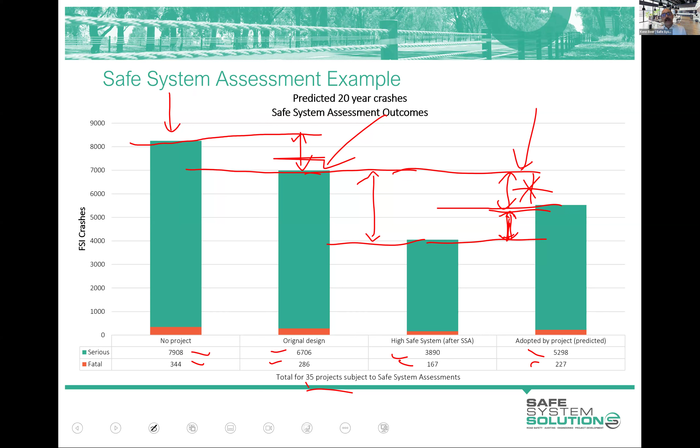It's probably another little addition that could be added to this evaluation, to say, what is the actual cost of those improvements? But nonetheless, they are able to be done, and they're accepted, and they're being built, and lives are being saved because of that assessment process. So that's pretty exciting. So that's one real takeaway out of this. Another one, I think it's important here. I'm going to change color on this one. Let's go to purple. What on earth is going on there?

Like we've said, 35 projects have had safe system assessments undertaken on them and provided recommendations on the best things that could happen, and we still see all of this residual death and serious injury, if they built all of the best things. Now, to a degree, this makes me go, this evaluation is probably pretty realistic, actually. They've done a decent job. Because this is stuff that either we do not know how to address, or is so far from politically, communally acceptable at this stage that we're not even recommending it in safe system assessments. And if you dig into what are all these deaths and serious injuries going on when we've done all this amazing road infrastructure?

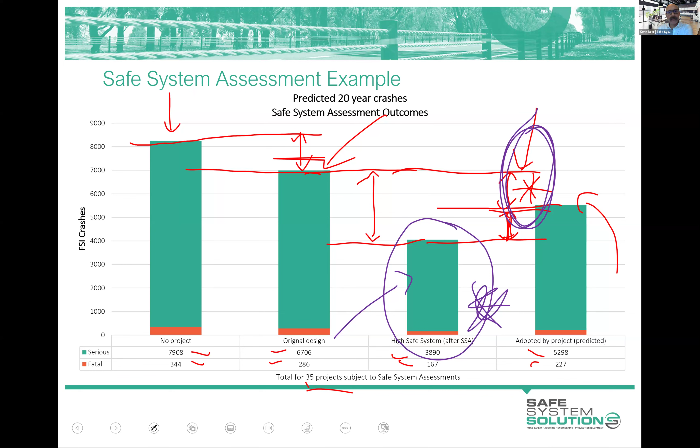Awesome. Okay. So that graph I was just showing, that evaluation, is a really wonderful demonstration of the benefits of safe system assessments and why we're pushing for those to happen. We're not saying road safety audits shouldn't happen. They absolutely have a place, but this safe system assessment process is available and it really injects safety into projects. It's a great way of determining how well a project aligns with safe system principles. You've seen the scoring. It's quite clear. You get some data, some graphs.

These things are quite powerful when putting them down in front of directors or executive directors or people making those final calls. Now we can put these down and say, hey, that's what it's been assessed as. Great for comparing design options as well. We've often struggled in the past to have anything other than an opinion-based comparative assessment technique for the safety benefits. Don't get me wrong, a safe system assessment has a bit of opinion to it, but it's more rigid in its structure on how to create that comparison.

It also integrates beautifully into a multi-criteria analysis, in the sense that you get numbers and you can feed those numbers into the multi-criteria analysis. Really nice at giving us those proposed design changes that will start to move us towards the elimination of death and serious injury, acknowledging the limitations we have at this stage, but we're going to continue to work on that. Great to assist planners, designers, and project managers to move the safe system approach from theory to practice.

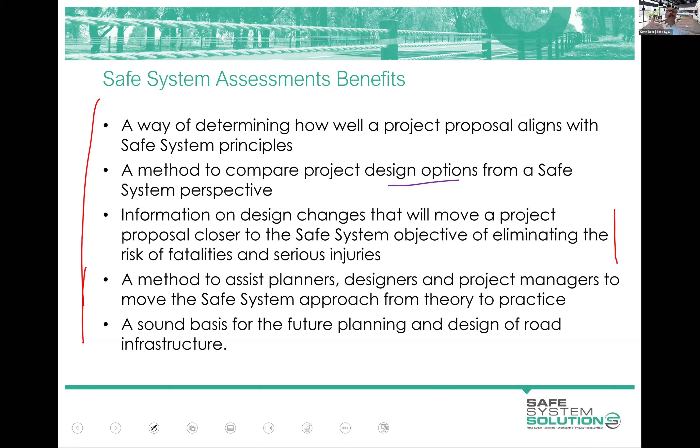We need local governments, state governments, territory governments, all getting safe system assessments done on their road proposals, their public transport proposals, their bike projects, their things. So a set of eyes like yours with some knowledge about safe system, and you'll continue to build that knowledge, but to be able to suggest things that we can get more savings of lives with their investment.

We know really that safe system assessment works beautifully in there because there's ability to still change the fundamentals of the project at these stages. Once you're down in something like detail, the detailed design's been done, they're very unlikely to change the fundamentals of the project. Budgets have been set usually, and things are moving along, and they're just detailing it up.

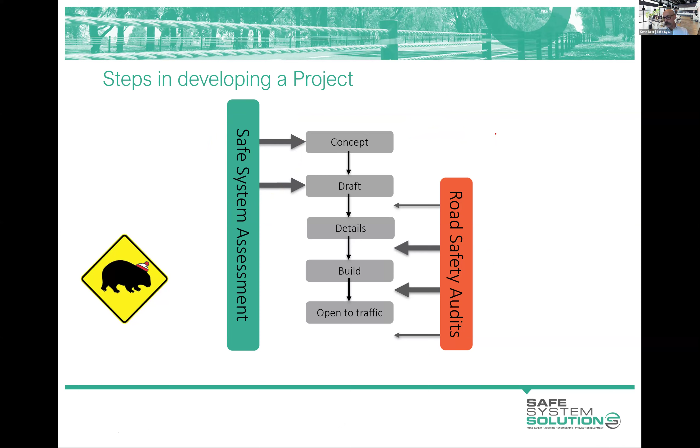Yeah. Okay, I'll show a little bit about that in like 5 slides' time, where I talk to you about some of the different registers that have emerged, like road safety audit registers and the like, and the things required to be part of that. So I will cover that in a bit more detail. And Brett's popped up one of the links that I will show as well, to the pre-qualification register for safe system assessors by the South Australian government. Victorian government has a similar one as well, but we'll get to that.

This doesn't come up as much anymore because safe system assessments are starting to be entrenched in practice in Australia. But for a long time, and it does still continue, people would say, why would I do a safe system assessment? I'm doing a road safety audit. That's going to cover it. And you say, well, yes and no. I mean, a road safety audit is a great tool. It injects safety into a project. All right. But safe system assessments have some other advantages.

And I've popped this sort of comparison little sheet. I have a more elaborate comparison sheet, and I've also included IRAP in the comparison sheet, the International Road Assessment Program. Maybe Loretta, we can dig that out. It's on our resource page on our website if you want, but we'll pop that into the learning management system.

But the likelihood of crashes is pretty well looked at in both audits and safe system assessments. The severity of crash is sometimes looked at in road safety audits. Sometimes it is ignored. And the classic is that large signalized intersection. And I see this in audits, I still see it, where they're looking at an 80 kilometre per hour road crossing another 80 kilometre per hour road, and there's a design for new traffic signals. And nowhere in that audit is it mentioning the result of red light running.

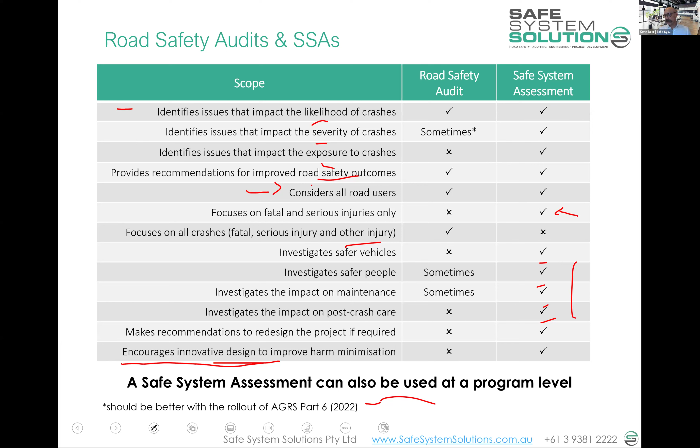Yeah, I had comments come in there. I mean, almost every jurisdiction in the world requires road safety audits to provide recommendations. New South Wales is the exception to that rule. Like, they don't want recommendations. So yes, recommendations are part of road safety audits.

Okay, so the way a safe system assessment rolls out generally is that somebody first of all decides, yeah, safe system assessment should be done. That's either a policy decision, they're following the policy, or somebody's got a reason why they say, yep, safe system assessment. Then there's a decision to be made: do we do a full safe system assessment or a rapid or light safe system assessment? I will explain the difference between these two later. They're not hugely different. There's just a few steps and a few efficiencies you get with a rapid as opposed to a full.

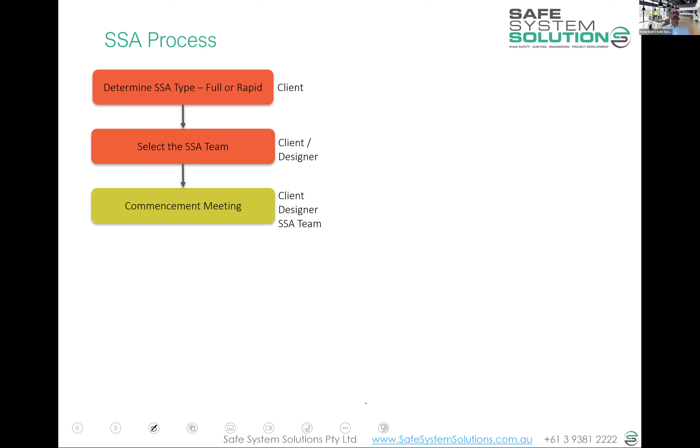Then they go, right, we're going to need to get a team together to do this. And they go and find a consultancy, or they get a team of people that they know have the skills to do a safe system assessment. And then they all get together, or they at least exchange information and make sure that everybody understands the context of the project, hand over all the designs and all the different planning reports and studies and collecting all of that information.

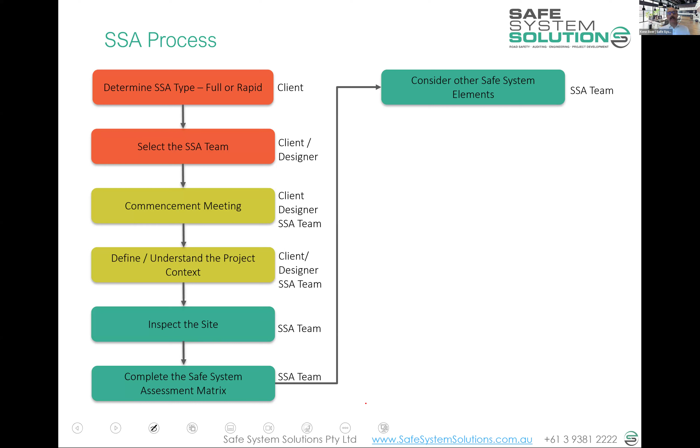Then the assessment team goes away with all of that, and they go out and they look at the site and they understand what the existing conditions are like, what the design is going to alter, how it's going to tie into different areas. They go and they fill out their safe system assessment matrix, which you're getting pretty good at now. They think through qualitative questions, and Max would have taken you through those, general broad questions. They come up with ideas to improve alignment with safe system principles.

They write it up into a report format. You've been given a template report. You're welcome to rebrand that in your own company branding, or your government branding, or whatever you want. But you're on that consistent reporting format and way that reports are produced. And they hand that over, and that's got recommendations. And the receiver of that report decides which of those things can be done and which won't be done, and then importantly actually makes those changes to the design and ensures that that's going to happen, so whatever's built is safer.

That's the general process, and people are generally pretty comfortable with this because it aligns kind of the same as the road safety audit process in general. And that was somewhat intentional in the sense of saying, well, we can add this process in, and it could replace the road safety audit process at different stages of the project, or be done alongside it.

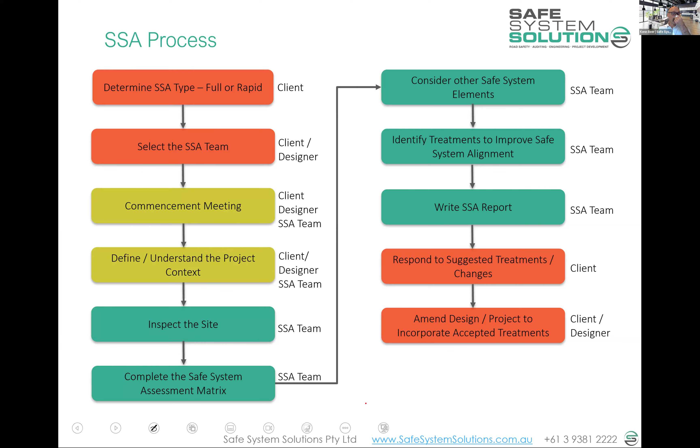Okay, the question came in around the register of safe system assessors. So the Victorian government has one on the VicRoads website, and you will be eligible to apply to be part of this after you successfully complete this course. The South Australian government has one as well, which Brett's put a link in there. And the way it works with the Victorian one is essentially you complete this course or an equivalent approved course.

Then you go out and you do a safe system assessment. Part of a team, you lead it, you do a full one, a real one, not the mock one we've given you as part of the assignment, because we need you to go through the full process with a client, essentially. And then you package that up and you send it into VicRoads. They review it. If they go, yep, this person knows what they're doing, they put you on the list. If not, they provide you some feedback and you can readjust it and have another go at it. So the Victorian one's just a list like this. It's a PDF, as the South Australian one is as well.

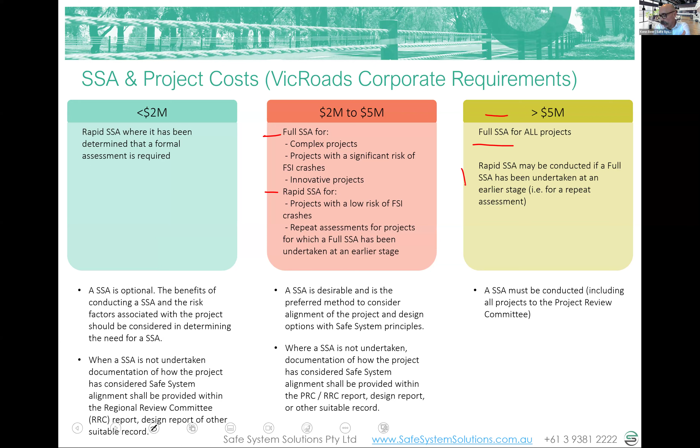So what is this rapid safe system assessment I talk about? Well, probably easiest I just show you the scope of both of these things. A full safe system assessment, you can see there, and a rapid. Now, if I run through the full, I'll cross them out if they're not necessarily required in the rapid. So commencement meeting, you're going to need to do some exchange of information. It probably doesn't need to be too formalized in a rapid. So I can sort of maybe half cross that out.

You're going to need to get the background information and context, right? Having a sit down workshop, roll out the plot and the plan and everything. Yeah, that can happen. It is even optional in your full, but it really doesn't tend to happen in the rapid one. Site inspection, again, this one is one of the ones that's said in a rapid, you may not need that.

You've got to look at the existing conditions of the site for both of them. Now, for the rapid, if you haven't gone to site, you might be doing that via photos or Street View or these sorts of things. Never as good as being out on site, but if we're just moving it through for a lower risk site or something like that, okay, it might be appropriate. You look at the existing conditions, you do your matrix. You then look at the design and you do the matrix.

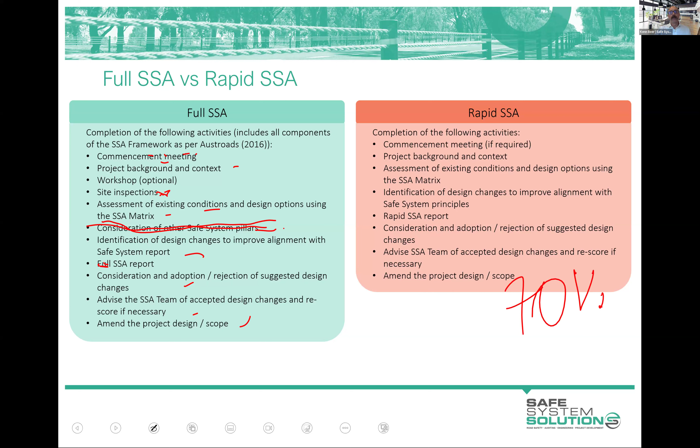Okay. I think I'll show these road environments after we have our stretch break. It's just a few road environments to, again, just talk safe system alignment. What's the best we know of at this stage? So you can be going out and making good recommendations as a safe system assessor. Any questions, Loretta, before I give everybody that stretch break?

Yes, please. So for a bypass where the existing route is still used once the bypass opens, say by local trips, is the existing base case the existing route? And for the design options, you'd still include the existing route as it will still be used. Yeah, it's a very good question. And so the answer is yes. If you've got a town, bypass is a great example. So if you've got currently a road runs through a town, that's your base case. Then you go to a bypass, right?

What you'll do is you'll look at the bypass route and you will create a safe system score matrix off that as compared to the existing route, but you need to account for what existing things will happen on that route. I can send an example of how that would work, but one of the real advantages of a safe system assessment under those scenarios is it really shows you this is a wonderful opportunity to do some significant works on that existing route.

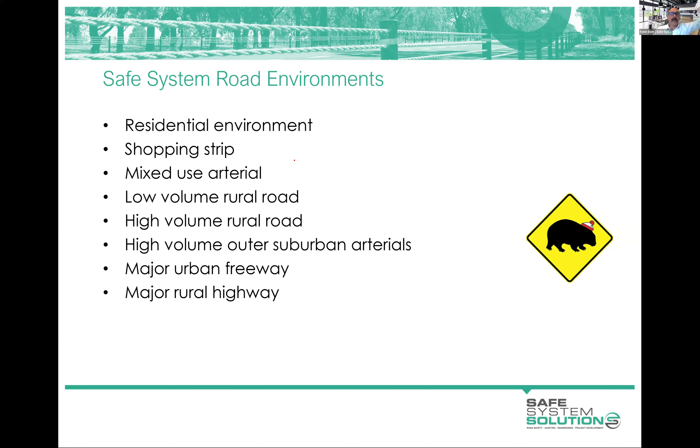We'll jump into it. So residential street environments, really under that movement and place context, which Max talked to you about, and thinking, what are our priorities for these sorts of roads? It's certainly not getting vehicle traffic through it quickly. So anything we can do to lower speeds down is going to be better aligned with Safe System principles. And in fact, blocking off a lot of the ability to use this as a through route is highly aligned with Safe System principles, reduces our exposure to crashes because there'll be less vehicles through there, and lowering speeds through speed limits, local area traffic management.

Now, some people talk about removing car parks to remove likelihood of crashes. I always caution you slightly on that. Yes, okay, we've opened up sight lines and things like that, but the cars parked narrow the road down and really keep people a bit slower. If you're going to do that, you kind of want to replace it with things that would keep that narrow nature or local area traffic management features to keep that speed down.

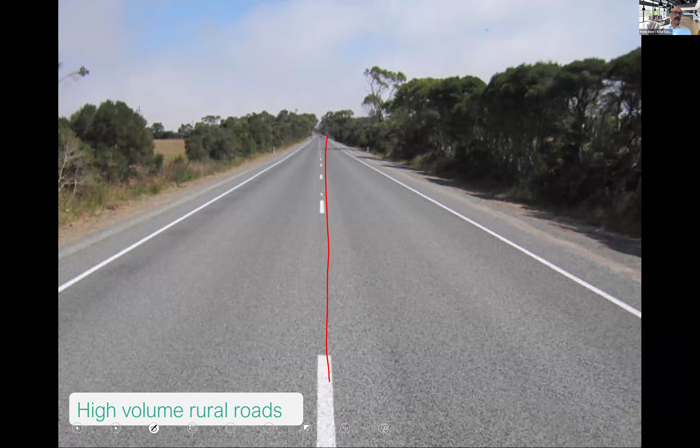On our higher volume roads, though, this is where the infrastructure spend goes. Doesn't look higher volume here. It is a much higher volume road, but really center barrier systems, outer barrier systems, providing that full containment. So high speeds, your 100 kilometer per hour and 110 can still happen, and vehicles can make mistakes, or drivers can make mistakes, and they are protected. Okay, it's expensive, but you are targeting this at your highest volume roads.

And then you sort of link that, if you've got that central barrier system, you can put a roundabout down there, because that's a really nice setup. If you've got access points and things, they can use the roundabout as their U-turn facility. They come down, they U-turn to go back the other way. You don't need to put lots of breaks in your barrier, and you can strategically lay out a route based on roundabout, central median. And that's a kind of fun exercise to do.

It's sort of forecast out a 30-year plan for a road, higher volume road, and say, okay, these are the big intersections we're going to roundabout out, and then we're going to put central barrier systems here and here, and then they'll use that. And then you can segment off, deciding how you roll that out in phases. It's sort of what we call a safe system scope ladder, where you'd say over time, what's the end state of this road that we want, and how do we step by step get there with this blueprint of the end road environment we want.

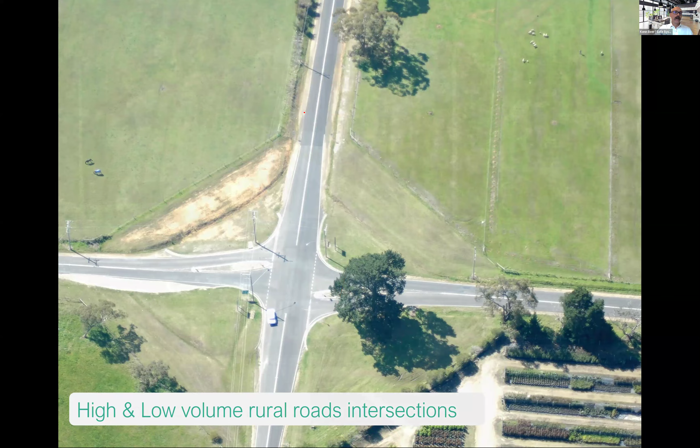Loretta. What about the use of musical roads to break the monotony of long drive and increase driver attention? Yeah, so the Japanese were the first to sort of do audio tactile edge line of different height and different spacing to create music, essentially, with that audio response into the vehicle. And it's kind of fun. I just love the fact that somebody's worked that out. And if you're driving the right speed and you go over it, it plays your little song. Fantastic. Love it.

In terms of fatigue management, we have trialed so many things to keep drivers awake. And the reality of fatigue is that you wake them up for a very, very short period of time, like 30 seconds with something like that. The only thing that cures fatigue is sleep. Maybe some illicit drugs, which we don't condone for other reasons, but you really struggle using physical infrastructure to wake drivers up.

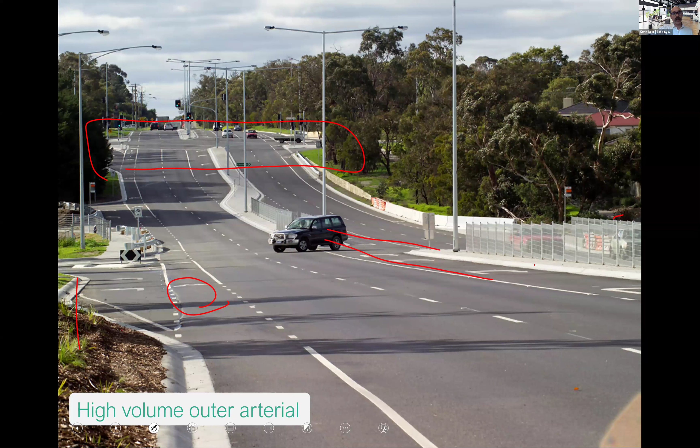But on these high volume suburban arterials or your major traffic routes, really those decisions have to be made. If this is about moving vehicles through there as fast as we reasonably can, you don't mix vulnerable road users with this 70 or 80 kilometre per hour traffic. That has its own separated, dedicated facility. We have to manage the energy at these sorts of major conflict points. We look to possibly close off areas like this if we can.

And then you're right, like bus stop, when they're dropped off or when they're getting to the bus, they're going to want to be going across here. So we've got to provide those separated facilities or slowed facilities. So lots of sort of stuff there to try and lessen likelihood of crash, but severity of crash,

and thinking genuinely about severity. So often in these higher volume outer suburban arterials, people just throw away the idea of severity and they just go, it's a new road. It's got great surface. It's got great lines. It's got great signs. We've got mast arms on the signals. And no, we need to say, crashes are still going to happen. How do we make them not severe?

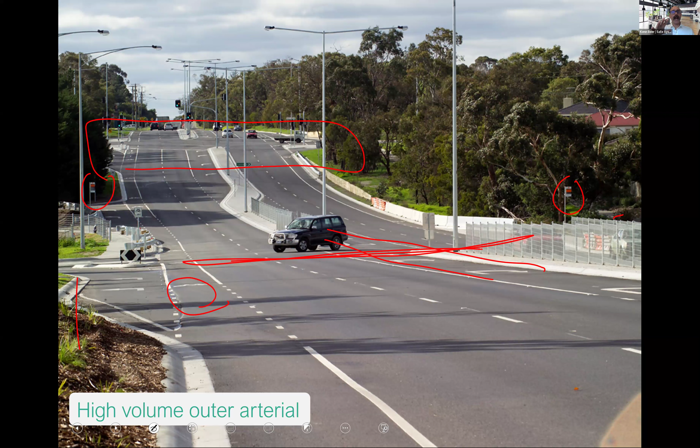Motorways, freeways, they're very safe system aligned. They really do have great safe system inherent design characteristics. Vehicles not able to crash head on. Generally continuous barrier systems, so when vehicles leave the road, they hit a barrier rather than a tree, a power pole, a culvert or the like. They don't have at-grade intersections. So we've got that delta V, the change in speed if crashes happen. So they really do perform well.

Where we understand the challenges with safe system here are with broken down vehicles and pedestrians getting out, or vehicles stopping late at night, taxis often, and pedestrians getting out and doing all sorts of stuff. They're usually intoxicated, and you see some pretty high rates of pedestrian trauma on motorways, and it's surprising considering that they are areas pedestrians are not allowed and fenced off from, but it is around that getting out of vehicles.

So that's one. And then as flow breakdown starts to occur. So when these are operating like they are in this picture, essentially free flow, extremely low crash rates. When they are absolutely congested, basically gridlock, the crash rate is high, the crash severity is nothing because there's not enough speed. So your fatal serious injury crash rates are non-existent. It is when we see flow breakdown starting to occur, so it's congesting and we get these rear end crashes and people at speed.

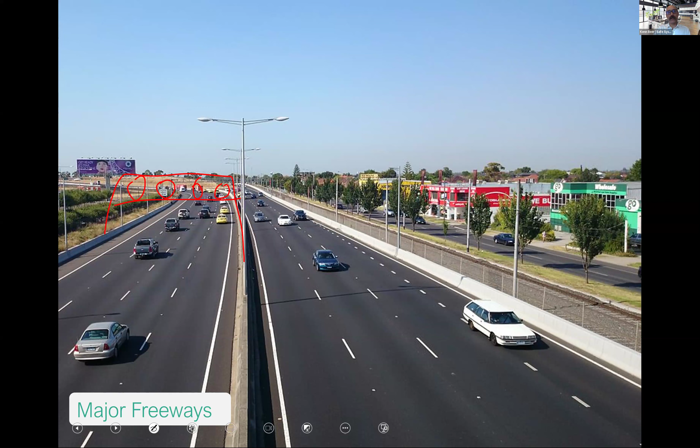So essentially managed motorways is our safe system next step on these, which is essentially to have gantries that can manage speed proactively just before flow breakdown, can block off lanes, can detect incidents early and lower speeds to manage that, have on-ramp ramp metering signals and the like to try to manage all of these incidents.

And I think finally our major rural highways, again, a bit like some of those other ones. I mean, these large medians are no longer needed unless you plan to add lanes into that in the future. You can just simply narrow that down, provide one central barrier system with a nice sort of 3 or 4 meter offset between each lane. That's going to be a really wonderfully safe system aligned outcome. If not, you're doing a run of barrier down each side, ideally, run of barrier on the outside.

This is the Hume Freeway. I did a business case for this one, $101 million basically of barrier system, just roll it out. And that was successfully done. It's pretty much full containment from the M80 out to the New South Wales border now. There are patches which are a little bit harder, but that's what you've got to do to create these high speed road environments,

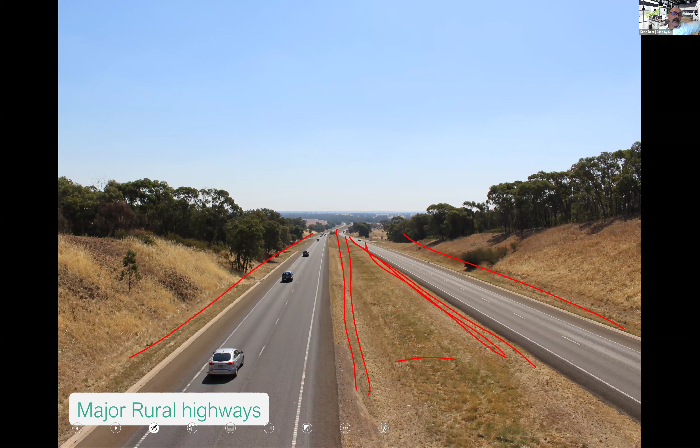and intersections, either grade separated or I would love to say roundabouts as well to slow those speeds down. The challenge on that is often these are your major national freight corridors, and they get a bit narky about slowing them down too much with roundabouts. So grade separation, obviously, but there is the ability to operate some at-grade intersections at high speed. If you've got a road like this and it's got an intersection like that, you've got a median in the middle.

The way you can sort of operate something like this at higher speed is close that off. You definitely can't have them crossing right angle on 110 kilometer per hour roads, and you provide an acceleration lane. So you get them up so the delta V, the change in speed, is equivalent. So full length acceleration lanes. Then you need enough space for them to get over, so you need some distance there. And then you provide that full acceleration lane back. And then again, the delta V is appropriate. And then they can either make their left turn or go straight.

And that's how you theoretically can operate these without having to do grade separation or a roundabout as a very well-aligned safe system treatment. The sort of interim one that is used a lot are those side road activated speeds. So when a vehicle's coming up here, either radar or loops trigger a speed limit reduction on this road, so for vehicles coming through here and vehicles coming through here. And they're proving pretty successful as well.

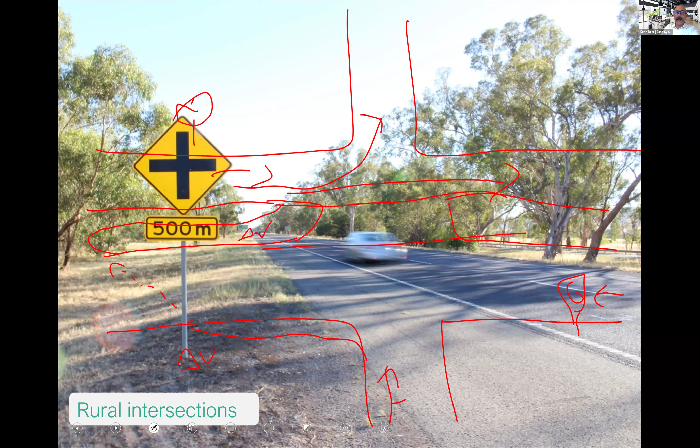And I think we're seeing some good low-cost trials out there. Brett, who's on this one, has been working on getting some nice low-cost ones of those. We've done lots in Victoria, probably a bit more expensive. And we want to start really deploying that sort of stuff.

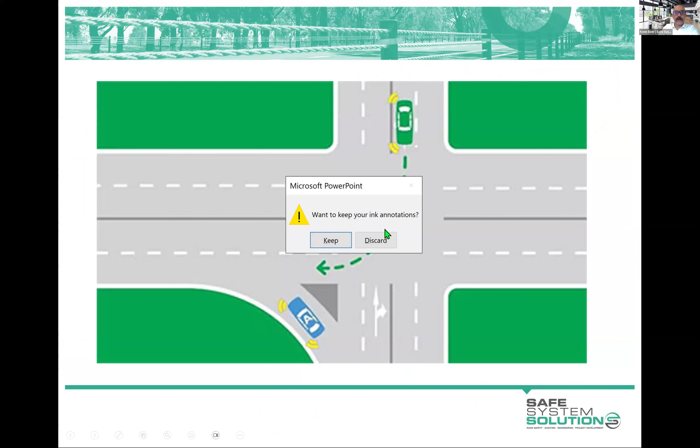Okay, I think that's probably about where I wanted to get to, timing this beautifully. Very briefly, I'm not going to do this extra content at this stage. You're probably still seeing my screen. If I can find my, here we go. I just briefly wanted to show you what an output of a reasonable safe system assessment on a pretty big size job kind of looks like.

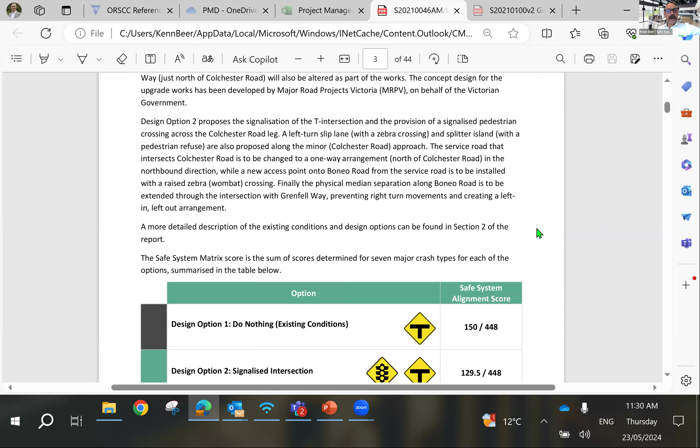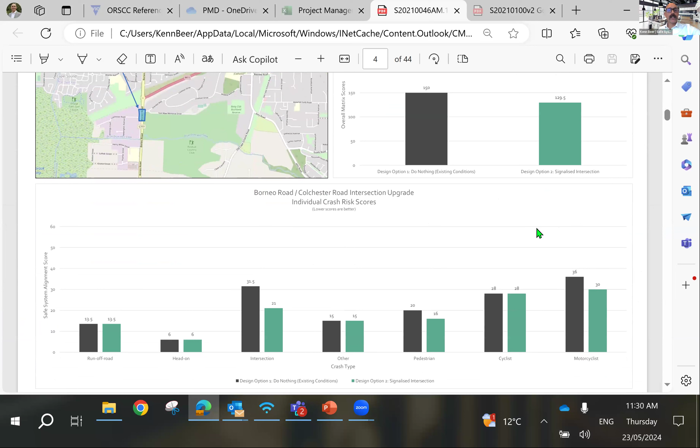You can see existing conditions or signalizing to give the numbers there, and you can see an overarching graph there showing the different benefits. A bit of a summary there. Some of the proposed treatments that could be done, and just flicking through it here a little bit more, there's some background info. You can get all this out of the standard safe system assessment template, which you're using, listing the team and the site visits and a bit of the site background and the like.

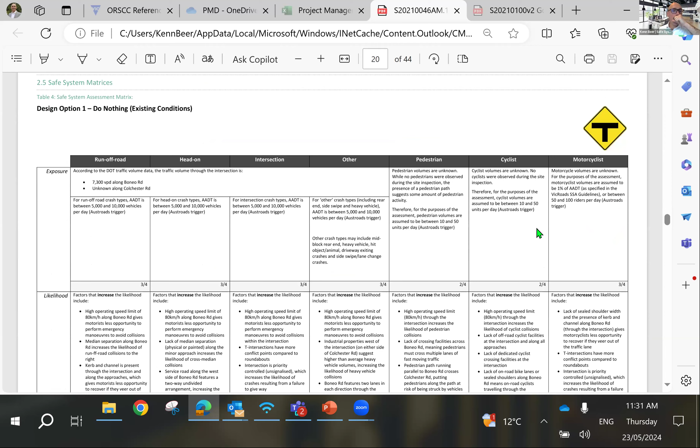And I want to get you down here to the matrices. Oh, so some of the prompt questions, gaining context, what do we know about the area, the background, a bit more about what the safe system assessment process is. But you can see here then that there's the existing conditions matrix, and there's a reasonable amount of detail in that, analyzing each of those, not so much in the exposure because that's just a volume-based thing, but the likelihood, you can see there's a few dot points, a few things that have been noticed out there, a few things that increase your likelihood, a few things that decrease the likelihood. And then severity, a few things that increase the severity, a few things that decrease the severity, some scores.

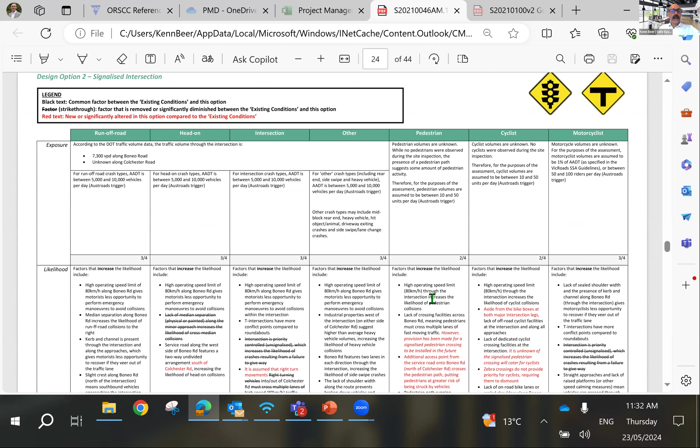And then for the actual project here, you can see they've taken that and then they've added bits, crossed bits out. These things don't exist anymore, or these ones are new now. And you get these new scores, which are sort of clearly put out there. So that's the kind of thing you'd be expecting. Then you've got the graphs, a little bit of commentary, some of the general safe system questions and ideas and thoughts that have popped out of that. This is a full safe system assessment, obviously.

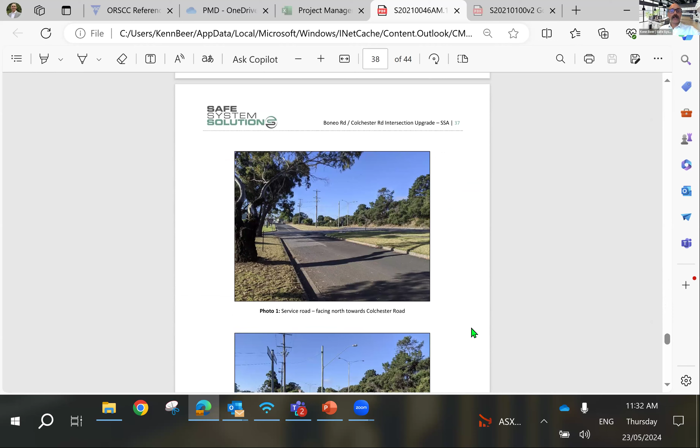And then recommendations. And you can see the recommendations there as primary recommendations or supporting. So it's a bit more than just a quick check and scrap a few notes in the matrix. A bit of other information in there. So I just thought I'd show you that, just to make you aware that when you're doing those full safe system assessments, there's a bit to it.

Okay. That's probably about where I've wanted to get to. I'll just see if Loretta's got questions before Loretta shows you how to finish the course. We do, yep. So just come through.

So what are your thoughts on innovative intersection types such as continuous flow intersections and diverging diamond interchanges? In jurisdictions outside of Victoria, are there any issues with only completing a rapid SSA for a project over 5 mil, if that is all the client or PM agrees to use as an input into an MCA?

Yeah, okay. So continuous flow intersections, diverging diamond intersections and the like, they are just intersection forms. We've got lots and lots of intersection forms out there, interchange forms, lots of different ways that we can do it.

They're driven often by vehicle flow, trying to increase vehicle flow and the like. You can Safe System assess these absolutely as you normally would, and you need to get into the analysis of each of those and understand what are the conflict points, what are the angles, what are the speeds, what are the predictions. Sometimes, occasionally, you're upping the likelihood due to confusion, and you can try to lessen the likelihood with better signage, pre-advanced warning, line marking, the lane configurations better, and these sorts of things. But you don't want to ignore the severity impacts of some of those. So yeah, they're always interesting to look at.